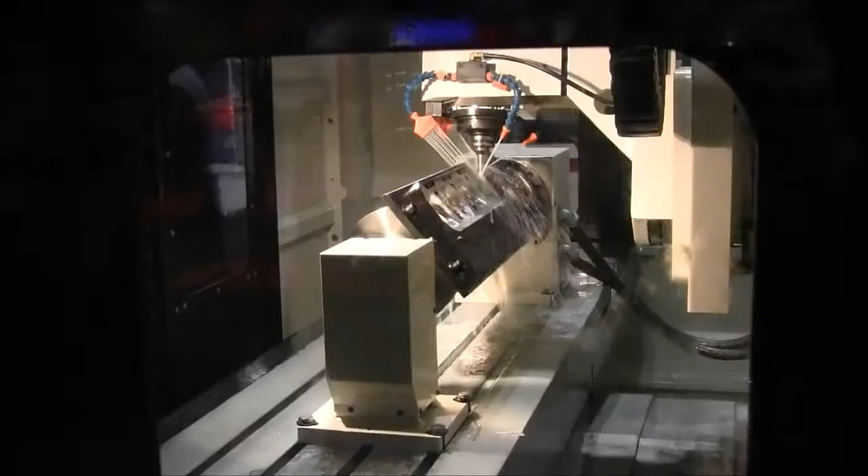The Rottler P69 is the world's most advanced 5-axis cylinder head porting machine, producing the fastest cycle times and most accurate ports in the industry.

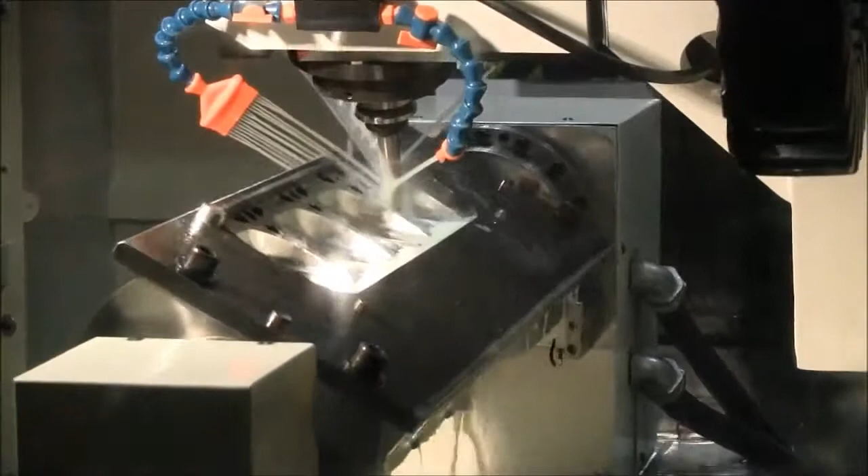Let's go through the steps to program a head and get it into production. The first step is setup. This is easy, just put the fixture on the machine and set zeros. Then put the cylinder head on the fixture. Notice both the fixture and the cylinder head are on pins. This means nothing will move on you once it's all bolted down.

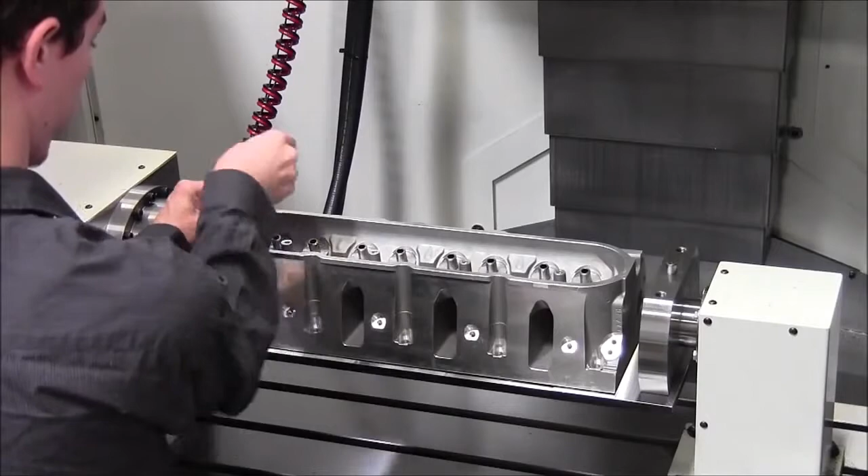Then comes digitizing. This is the P69's claim to fame. Combining the industry standard Renishaw probe and P69 digitizing software, the only input required is a 3-point plane on the entrance of the port and the exit of the port. Then you just tell the machine how many slices you want through the port and start probing. No other solution on the market is as simple.

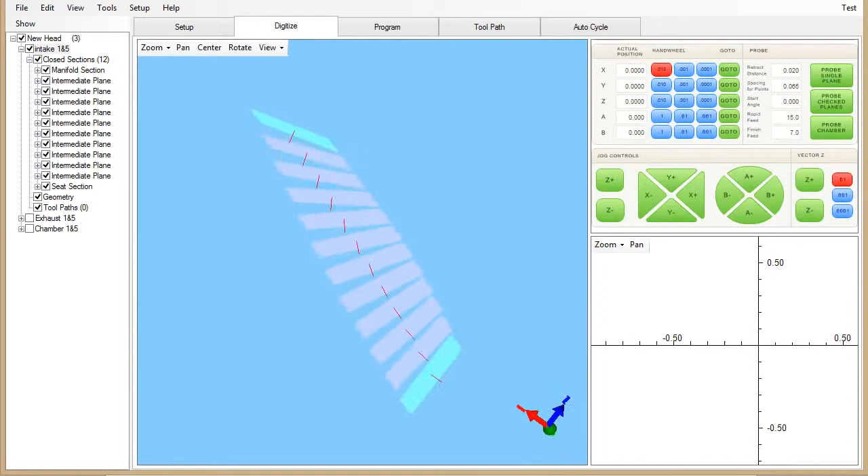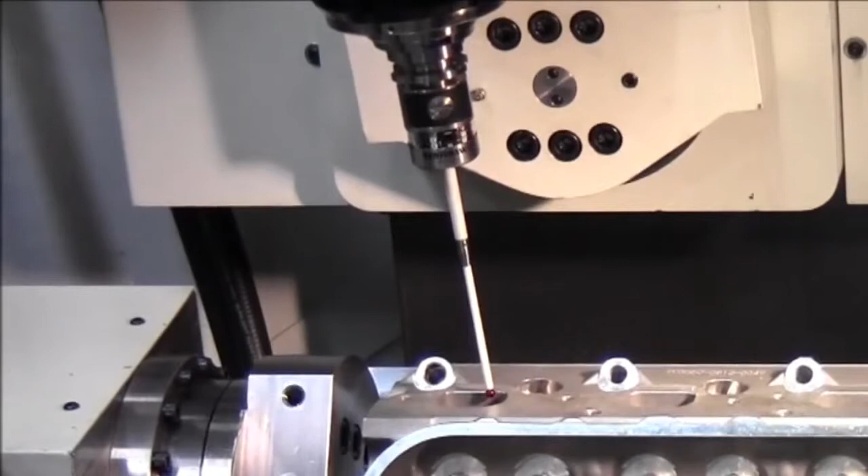This process takes between 15 and 45 minutes depending on the size of your port. Notice how our software digitizes in 5-axis. This means the shank of the probe will not touch the wall of the port, which eliminates manual cleaning of the data before creating a surface.

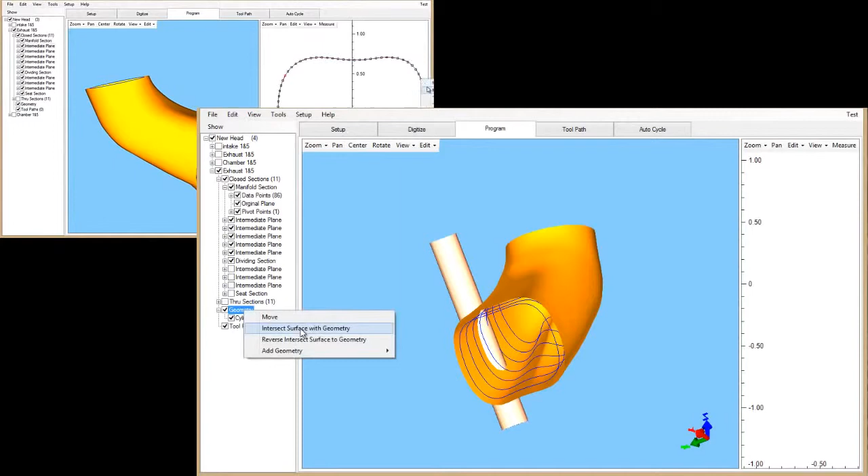Next, you can let your imagination run wild by making any changes you want to your port. For instance, you can add a D shape to any part of the port you want. You can even insert cylinders to represent a bolt hole, then tell the software to leave a programmed amount of material between the bolt hole and the port. You can even create an arc through your short turn and snap the 3D solid right to the radius. Or you can raise the runner by a programmed amount. Skew the ports from side to side. All of these features and many more can be done in seconds.

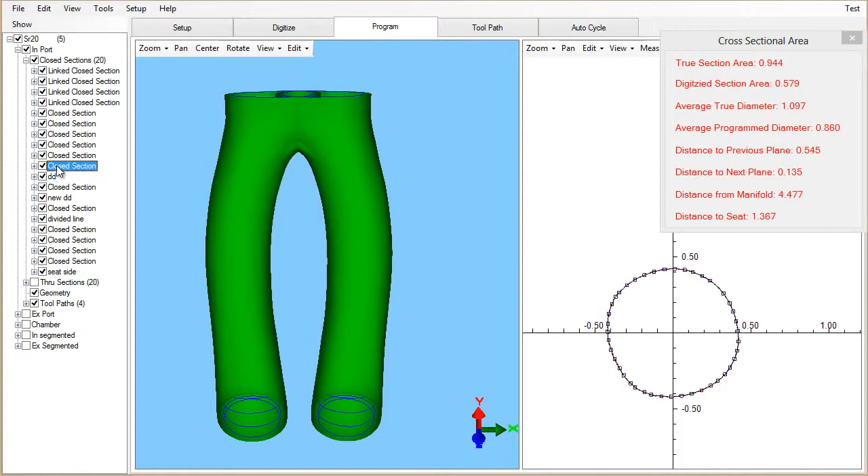As you're making these changes to your port, you can also look at the cross-sectional area of any of the slices through the port. You can also right-click and get the volume of the port.

After you have made any desired changes to your port, you enter which tool number you want to use and your desired toolpath step over. The software will then automatically calculate tool angles, which you can then view by moving your mouse over any area of the port.

Then you just press cycle start and sit back and watch the machine port your head.

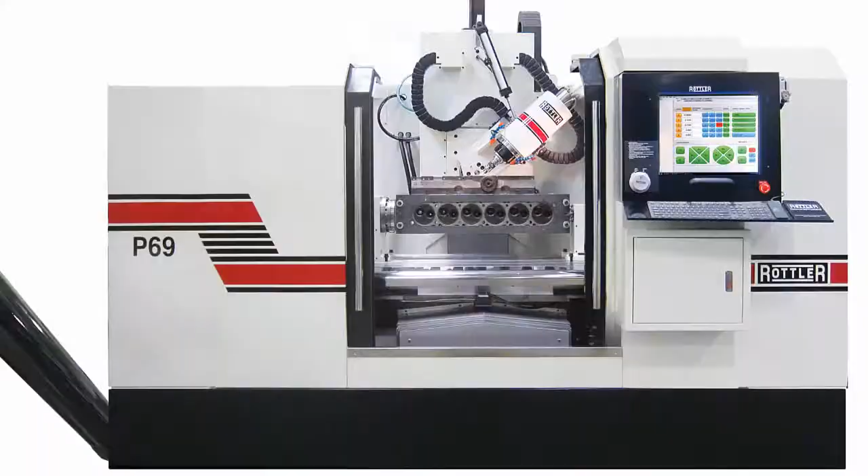Because of our tilting B-axis design, the Rottler P69 will port any head that fits on the machine, from small 5-valve motorcycle heads and hard-to-reach heads like Subaru and Duramax, to big V8s and inline 6-cylinder heads.

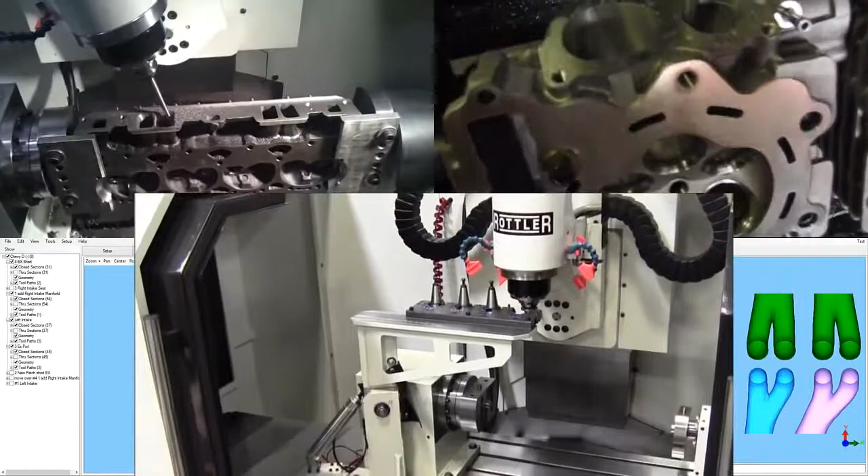We can do cast iron. We can also provide custom fixtures for specialized projects such as high-volume production. And with our simple, cost-effective automatic tool changer, you can leave the machine running completely unattended. We really do it all.

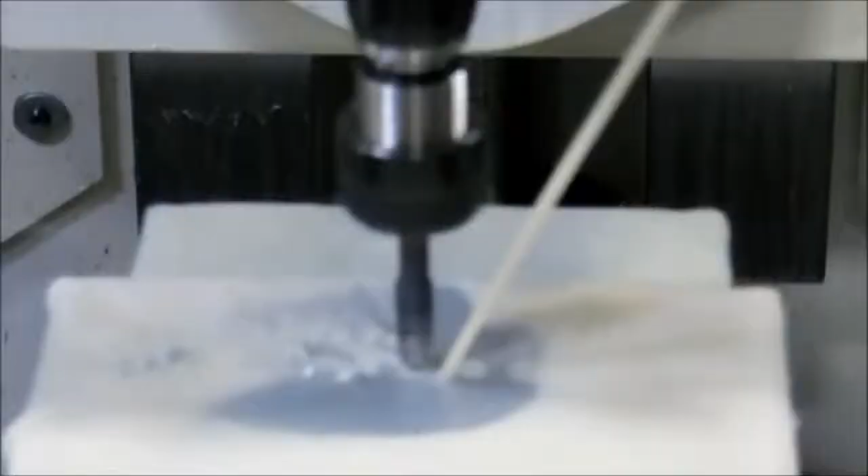The P69 can perform many non-porting machining operations using Rottler Cam right on the machine. From simple operations like drilling and tapping, to engraving on the side of the head without refixturing the head. You can also use an 8-inch fly cutter to surface heads.

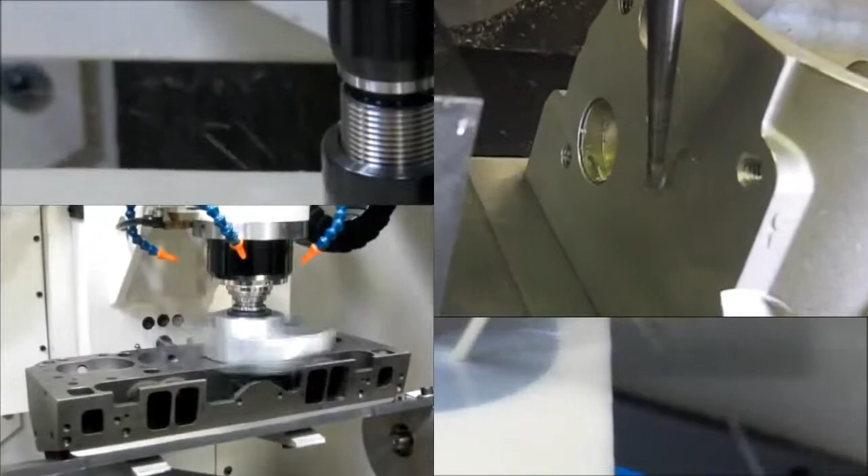The P69 can perform all operations to machine a head from a raw casting: shell mill surfacing, seat pocket machining, head bolt and guide hole machining, and heavy roughing.

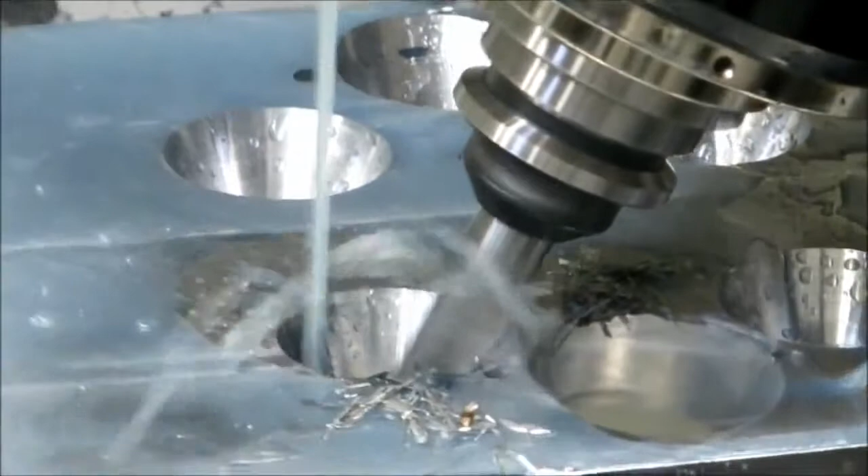The 5-axis capacity can be utilized easily by turning on a draft angle. This interpolates the 4th and 5th axis to maintain a constant draft angle that is perpendicular to the toolpath movement, as you can see in this circle with a 30-degree draft angle.

All of these operations and many more are programmed right on the machine using Rottler Cam with no outside CAD/CAM software. This means no G-code knowledge is required.

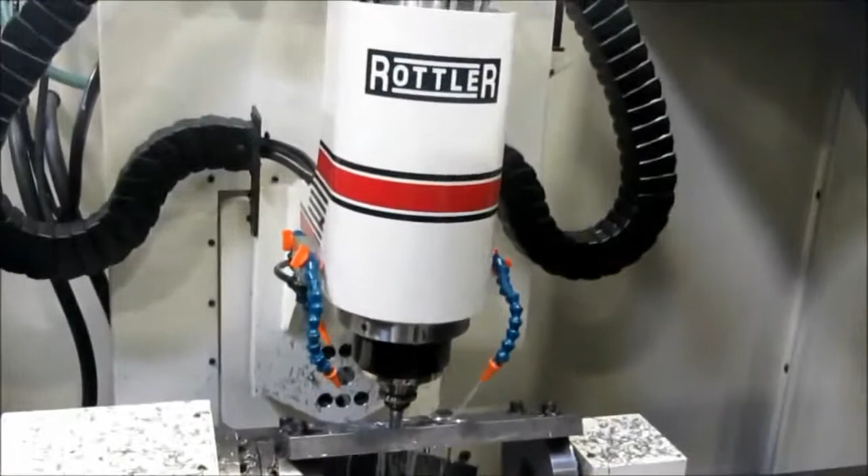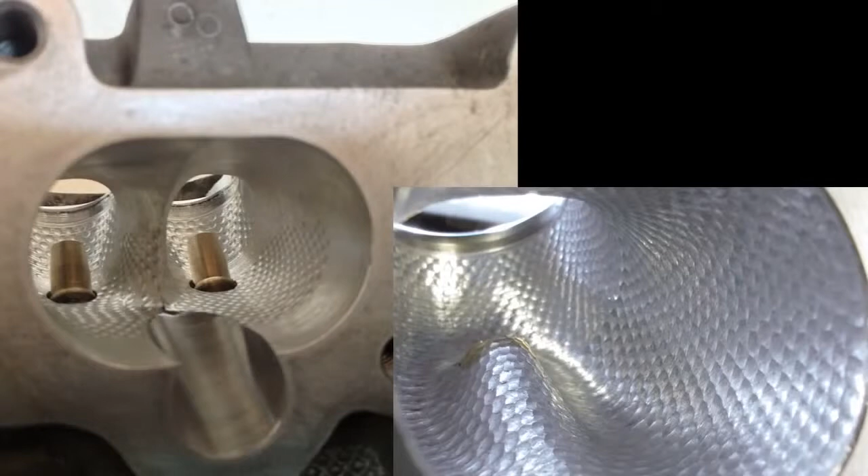One of the P69's most valuable capabilities is our patent-pending dimpling software, producing the golf ball effect in any port. Using our dimpling feature, many companies have proven an increase in horsepower, like Tracy Dennis of Sunset Racecraft, who just purchased his second machine.

Rottler has invested in modern internet support systems. Our entire head porting training is online in video format, accessible from the machine. While we do include 5 days of training with every P69, our training videos are so detailed that we've had companies learn 100% from the video library.

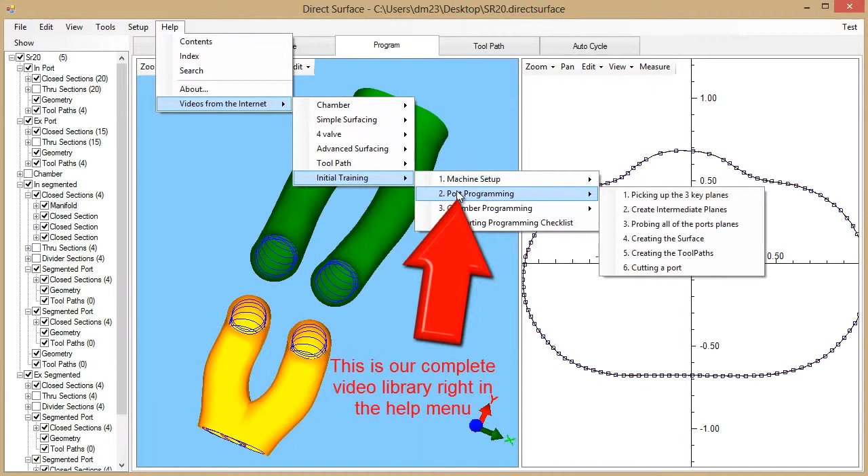A Rottler tech can also log in remotely using modern internet tools such as LogMeIn and Skype to help customers optimize the use of their machine. We can log in a matter of seconds and operate every aspect of the machine as if we were right there in your shop. Technology is amazing, and our Windows-based control allows Rottler customers to benefit from these advances in technology.

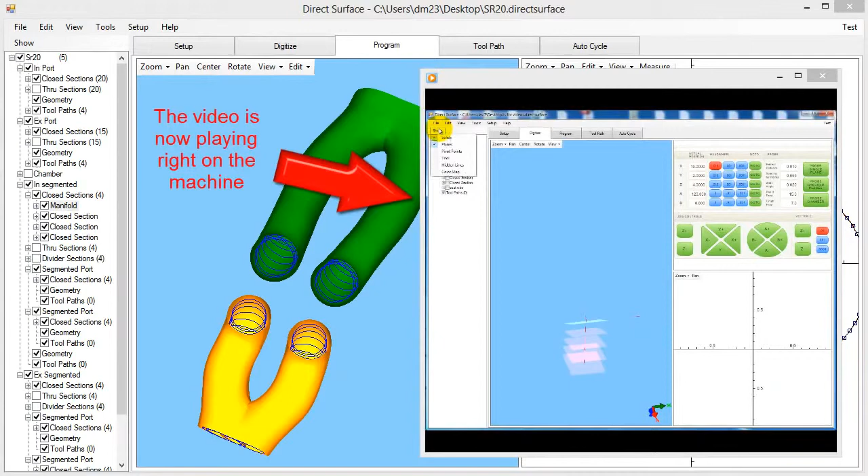Just ask Tim from NG Motorsports, who we have mainly supported over the internet a half a world away in Germany. Tim is one of only a few people that has experience using the competition system and our system. Tim decided not to purchase another machine from the competition, but instead to purchase a P69. According to him, the machine choice is obvious.

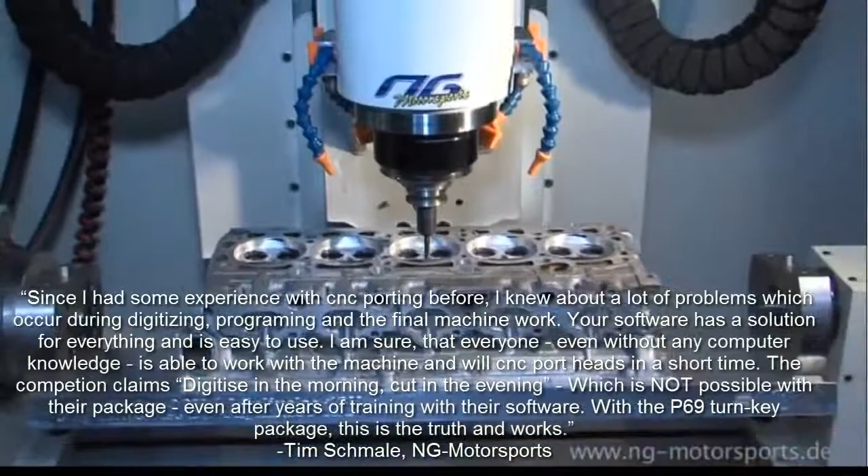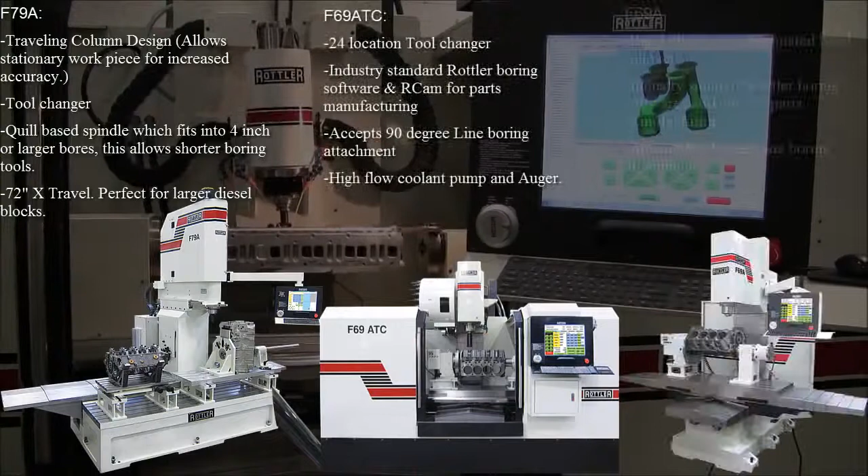Depending on options, the recently discounted P69 is priced in the mid to high 100,000 range. We believe a single-purpose machine is more cost-effective than a machine which claims to do both heads and blocks. Shops that combine a P69 with a rigid block machine will outperform any shop that invests in one machine which claims to do both heads and blocks.

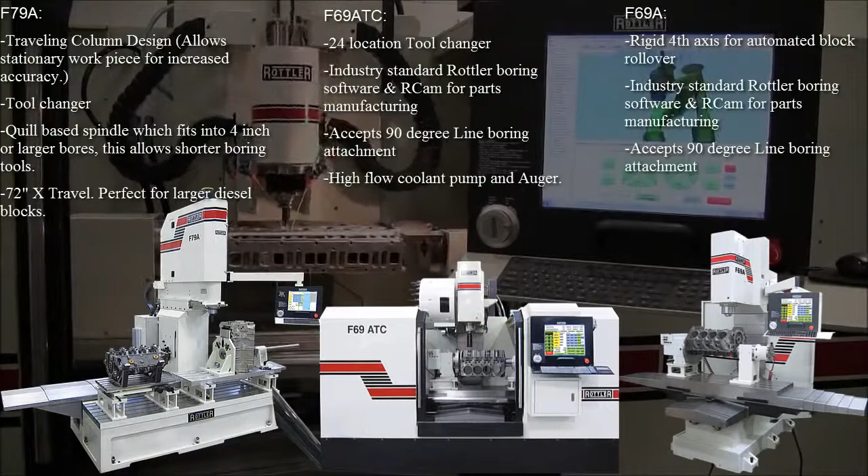The combined cost of our two machines is in the same ballpark as our competitor's single machine, and this incremental purchasing gives shops the flexibility to run heads and blocks simultaneously, doubling your shop's capacity. Simply put, two machines are better than one.

Rottler Manufacturing is the world's largest and most diverse engine building machinery manufacturer. Founded in 1923, Rottler has constantly focused on the cutting-edge developments in technology. In our 50,000 square foot facility located in Kent, Washington, we design, manufacture, and assemble our machines right in the USA.

Let's do a quick factory tour. Our first stop is the diamond hone department, with multiple configurations for a variety of cylinder lengths and diameters.

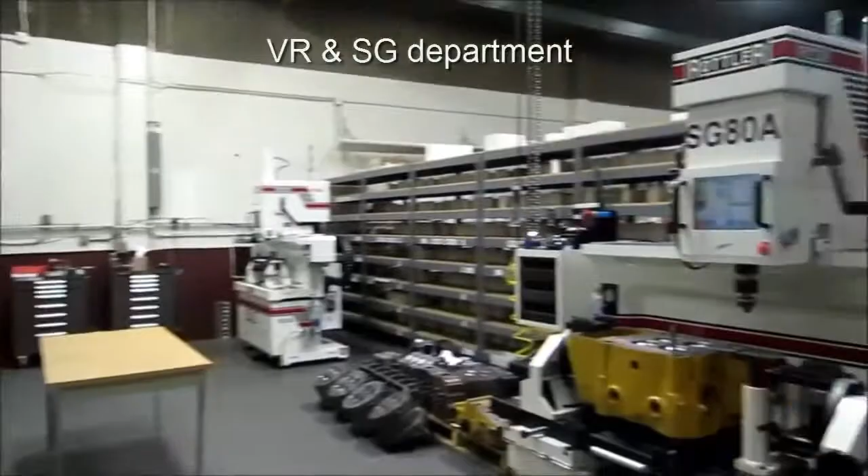Then, right down the hall, we have our valve refacing and seat and guide department with manual and automatic versions to accommodate a variety of size and configurations of heads.

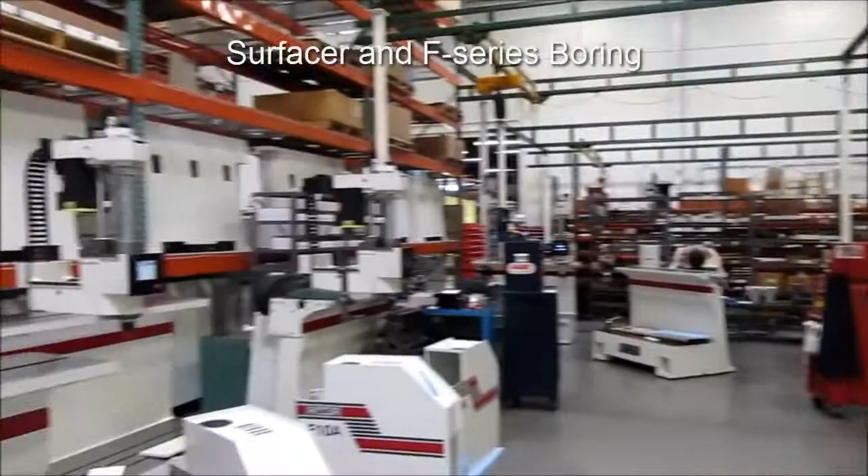And in our recently added 25,000 square foot assembly plant is where we assemble all of our surfacing machines and our smaller F-Series boring machines with the recently upgraded Windows control.

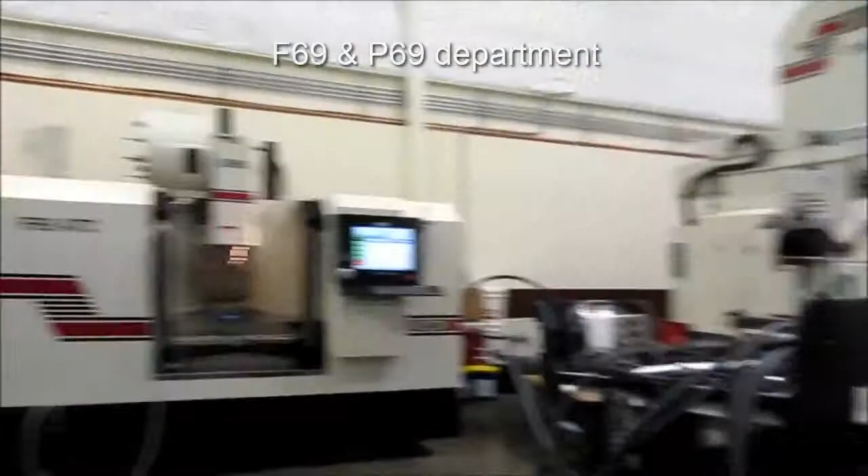And in the back of the factory is where we assemble our CNC product line, such as F69A, F69ATC, and P69. Then we move on to the really big machines like the F79 and F100 machines, which are designed for a large industrial market.

And finally, our machine shop, where all of our high-tolerance critical parts are manufactured. Many of our parts are machined on our own F69 ATC shop machine. That's right, we put our own machines to work manufacturing parts for production machines.